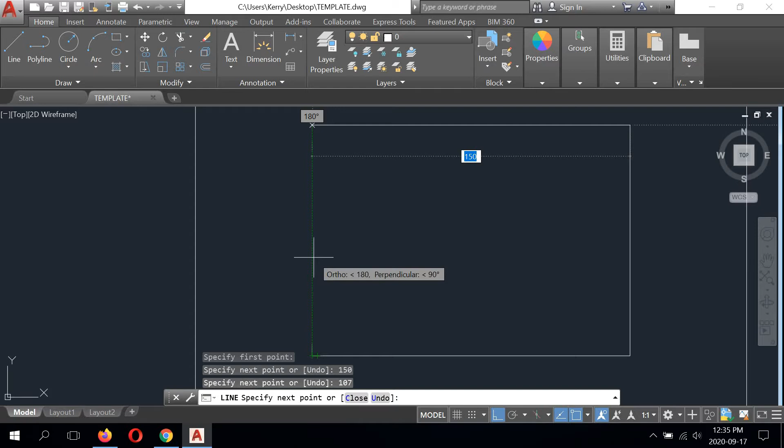Now to come up vertically, it doesn't give you an overall length. It gives you two numbers, 72 and 35. So to add those numbers up, I'm going to get 107. Key in 107. Now, instead of keying in 150, like I've shown you before to come back, I'm going to bring my cursor down, and I'm just going to touch the origin where I started. And this is going to create what's called an OTRACK, where you see this green broken line, and it actually previews 150, as you can see there.

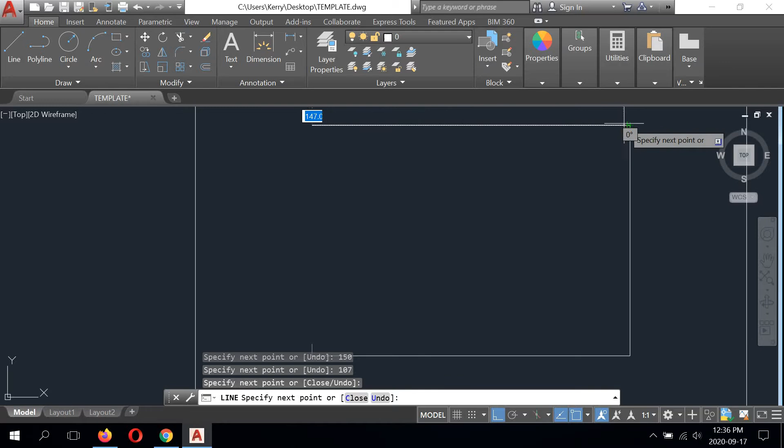So this is one way to avoid having to key in redundant information. You can just touch certain parts of the drawing with your cursor, and the OTRACK will pick it up for you. So that's what's happening here. So while I see that, I'm going to left click, and I've got this line drawn 150 millimeters long. Now I can just come down and type C enter to end the command and exit out of the line command. So moving onward.

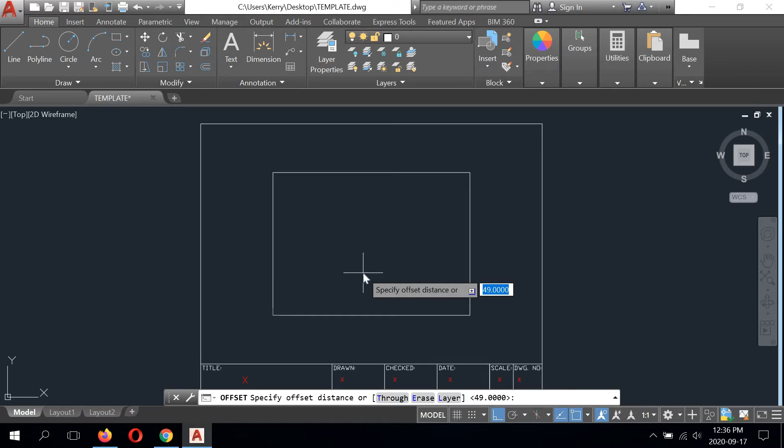We're going to start with doing all of the bevels first, or the chamfers we can call them. So I'm going to start by picking offset, and I'm going to do the first one, which is 20 millimeters away from the left vertical line. So I'm going to type in 20, and I'm going to select this line and click to the right, right click, left click, enter to escape the command. Now we're going to go into polar mode. That angle is 30 degrees, so I'm going to make sure that this is changed or set to 30 degrees.

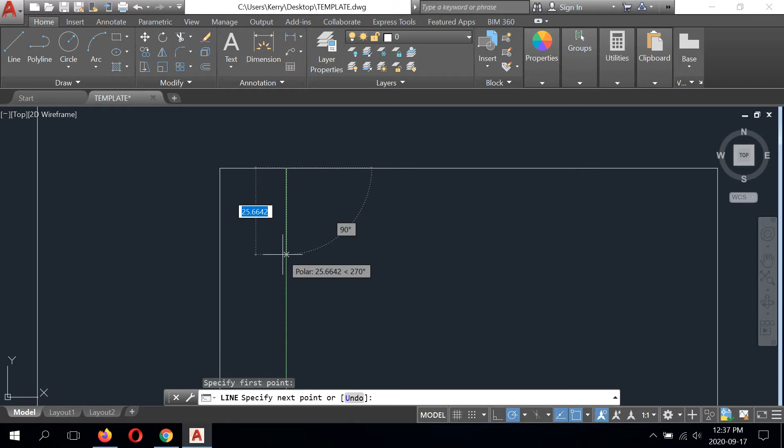Pick my line command, come into this endpoint, and come down on 120. 120 is the same thing as 30 because this is 90 degrees, and adding 30 will make it 120. So we'll come down to this intersection and left click, right click, left click. We're going to take this line and erase it because we don't need it anymore.

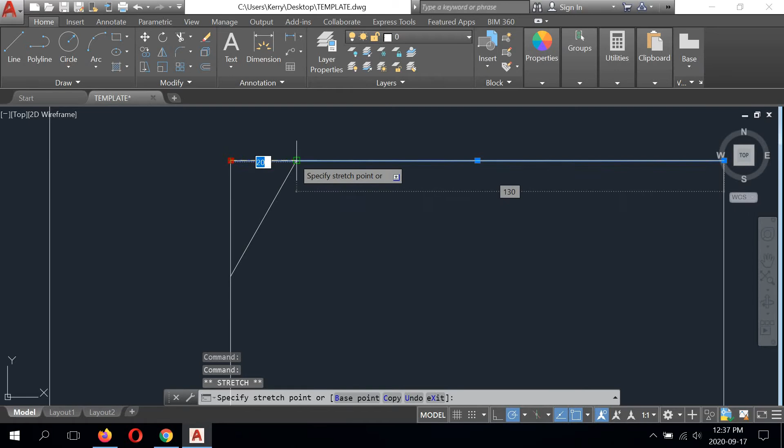And instead of using the trim command, there's another way I can clean this up. I can just select this line while I'm using a grip, and I can just select the node and I can drag it back to this endpoint. And I can also do the same thing here. Pick this node, drag it back to this endpoint, and that's just as good as trimming. So that's just another alternative for you to use.

The idea of showing you all these different commands is that the hope is you're going to see what you like and you're going to develop your own style, right? Every student may draft a little bit differently, but it doesn't matter as long as the end result is correct. So I want you to try to find what you like and kind of get into that groove.

Moving onward, we're going to look at the top right hand side of the drawing, and we're going to create the two angles that are 15 degrees that intersect one another. So to find the length of it, it is 72 millimeters from the top right to the left. So we're going to use an offset. Key in 72, enter, select this line and click to the left. Right click, left click, enter.

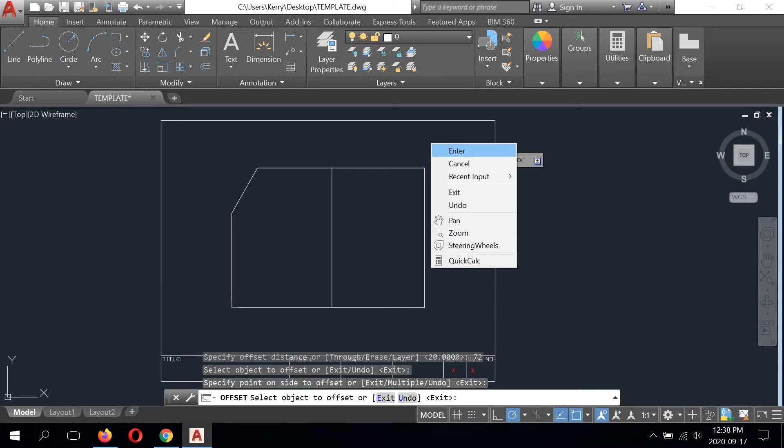Now we're going to go back to polar. We're going to change the setting to be 15 degrees. So we're going to change it here. Pick our line tool again, pick this endpoint, and we're going to come on an angle of 165, which is 15 from 180. That's going to land us about here at that intersection. Right click, left click, enter. Right click, left click, repeat line. This is the same angle, so start at this endpoint, come down on 75. 15 less than 90.

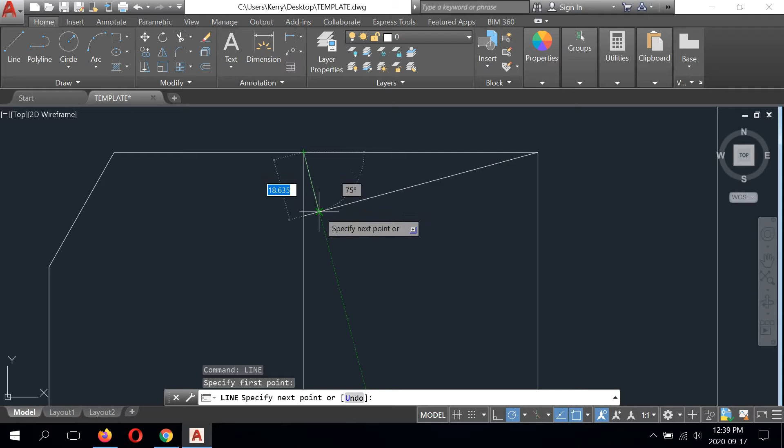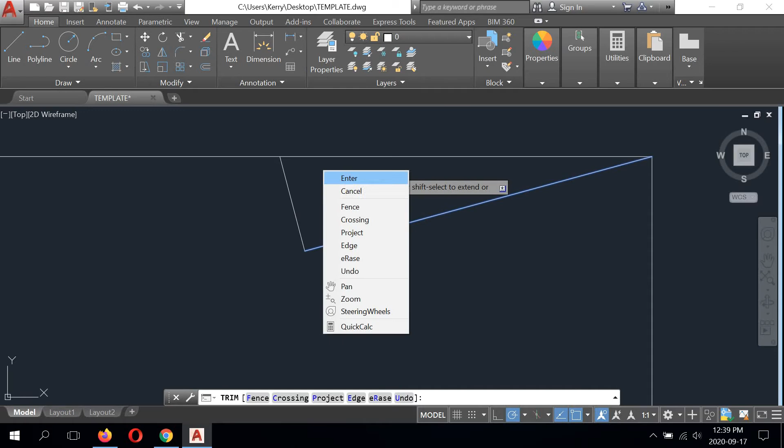Intersection. Right click, left click, enter. Okay, so this line can be erased. We can trim this or we can use a grip. I'm going to use a grip for now, so I'm going to select it, just snap it to that endpoint. And I'm also going to trim. I'll trim this one up here just for fun. Boundary. Right click, left click.

Okay. It's the exact same thing in the bottom right-hand corner, except it's vertical. So again, we're going to offset again. Now, I don't need to key in 72. I can just hit enter, because if I'm repeating the same offset, AutoCAD remembers the last input. So it remembers 72, so I can just hit enter and pick this bottom horizontal line and then offset it up. Right click, left click, enter.

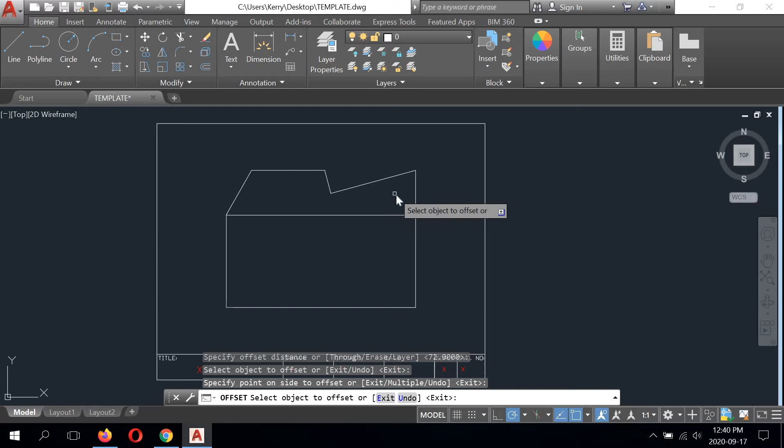Select our line. Start at this bottom endpoint snap, click, and come up on 105, which is 15 more than 90. And end the command at this intersection, left click, right click, left click, repeat line, select this endpoint, and we're going to come down on 165.

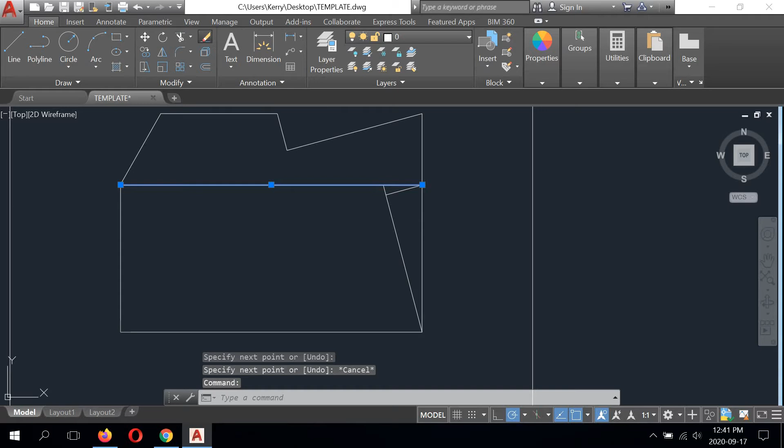This line erases. We can use a grip, bring this down into that endpoint, and we can use a trim.

Sometimes it's clunky for me to end some of these commands because I'm recording while I do this, and if I was to hit my escape key, it'll actually just end the recording. So I have to make sure I never touch my escape key. It's the one thing I can never use when I do these lessons, and sometimes I like to use it when I'm making drawings on my own. So that's why sometimes it looks a bit clunky when I'm trying to end these commands.

Okay, moving onward, we have one more angle left, but we're going to do this one a different way. This is something I've never shown you. We're going to use a modify tool to do it. We're going to modify existing geometry. So up here in modify, next to mirror, we have the fillet tool. And if we click the arrow, more options appear. So we want to select chamfer.

But we just can't go picking and choosing. We have to read the command line. The command line says, select first line or undo, polyline, distance, angle, etc. We have a distance of 28 and an angle of 45 degrees, according to the iPad I'm looking at. So I'm going to select angle, and I'm going to key in the distance as 28. And now it asks me what the angle is supposed to be. Well, the angle is 45. So I'm going to type that in, hit enter.

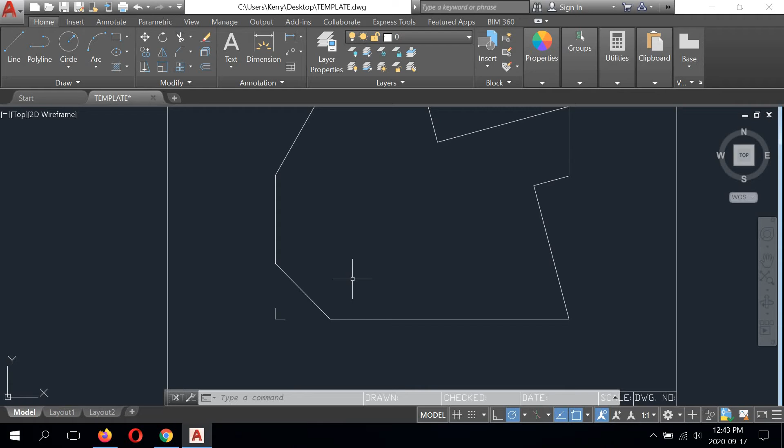And then I can select this vertical line and this horizontal line. And it's automatically going to modify that geometry to give me that bevel in the corner. So instead of using offsets and using a polar, this is a quicker way to execute that angle. So that's something else you can add to your toolbox.

The next thing we're going to look at is the symmetrical, I call it an arrowhead, that sits in this area right here. So to find some starting positions, we're going to use offset again. This time key in 16 as your value and hit enter. And I'm going to offset this line up 16. Right click, left click, enter.

Now we're going to have to offset this line over. Now there's no whole value for that. I have to add some numbers up. From the bottom left-hand corner of the arrowhead, from the most left vertical line, is 57 and 28. So the easiest way for me to add that up in my head is to just add 30 to 57 and then subtract 2. That's something my grade 5 teacher taught me. So 57 plus 30 is 87, subtract 2 is 85. So 85 is our number.

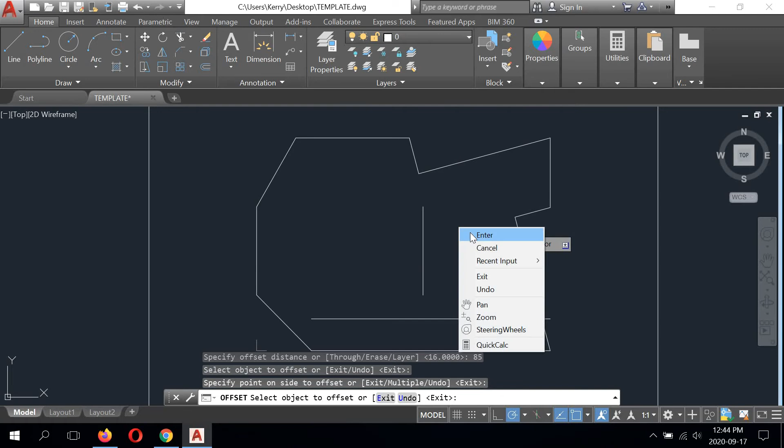So select offset, key in 85, hit enter, and then select this vertical line and click to the right. Right click, left click, enter to end. Now, because I've already done this chamfer, this doesn't reach down like I need it to. So what I can do is I can turn my ortho back on and then just select this as a grip, pull it down to meet the perpendicular snap.

And then one more offset to find the center of this. So I'm going to hit offset, and the next one is 23. It's symmetrically 23 on both sides of the arrowhead, so we need one offset of 23. Let's try that again. Just hit enter. Right click, left click, enter. Okay, so now I have, this is going to represent the center. This is the anchor point to get that arrowhead started.

So the angles we need are 45 degrees and 15 degrees. So I'm going to go back into polar mode, right click, select 45. Actually, I'll keep it on 15. I'll do that one first because it's already set. So I'll grab the line, start at this intersection and come up on 15 degrees and then end at that intersection right there.

Right click polar, switch the angle now to 45 degrees. Right click, left click, repeat line. Find that endpoint. Find 45 degrees, see that green beam, and bring it right up to that intersection. Left click, right click, left click, enter. So there's half of the arrow drawn. Now this line and this line I can get rid of. I'll just erase them. And I can mirror this to the other side.

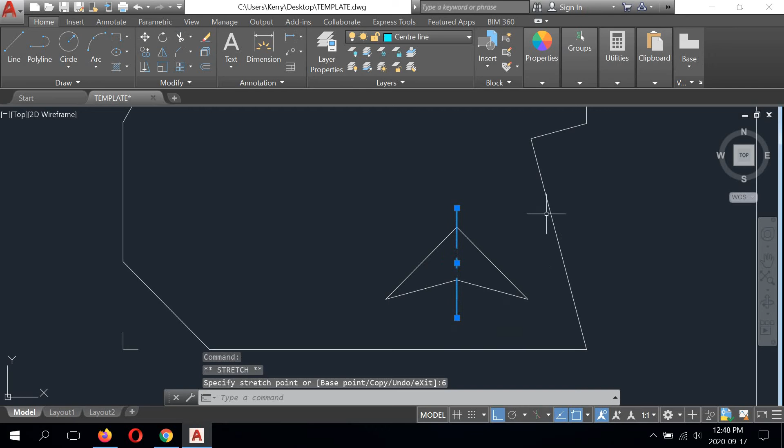We're going to take this one, stretch it down vertically, and key in 6 here. All right. So that center line is to represent the symmetry of the arrow, right? This drawing only requires 1, and we'll talk more about that another time. Okay. I'm having a problem with exiting my commands again.

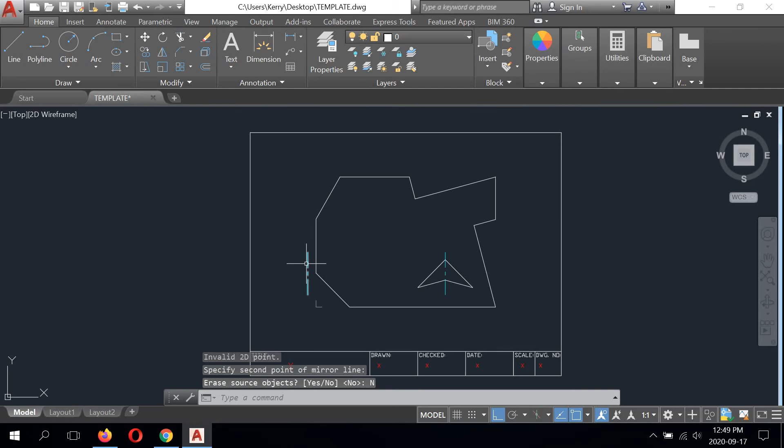Okay, so the last thing we have to do is draw that horizontal bevel T that you see on the drawing. So we're going to start with offsets again. We need to find some offsets to be able to find some anchor points to start drawing lines on polar. So we have a line that comes up 27, then comes up 30, and comes up 30. So we're going to start with the line that's 27.

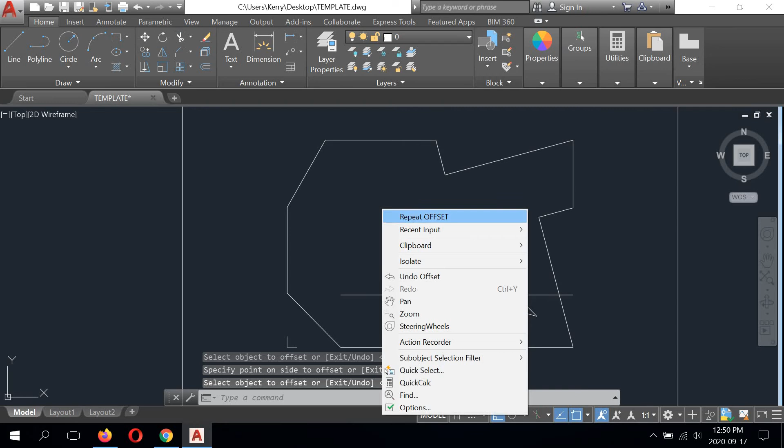Type 27, enter, take this horizontal line, and offset it up. I have to end the command here because I need another offset value. So I'm going to right click, left click, repeat offset, and I'm going to key in 30 this time. Enter. This line is offset once and twice because it's the same value. Right click, left click, enter.

Okay, now we need to offset this vertical line over. That is shown on the drawing as dimension 29 millimeters to the center tip of the T. So again, the offset this time will be 29. We'll key in 29, enter, offset this line over to the right. Right click, left click, enter.

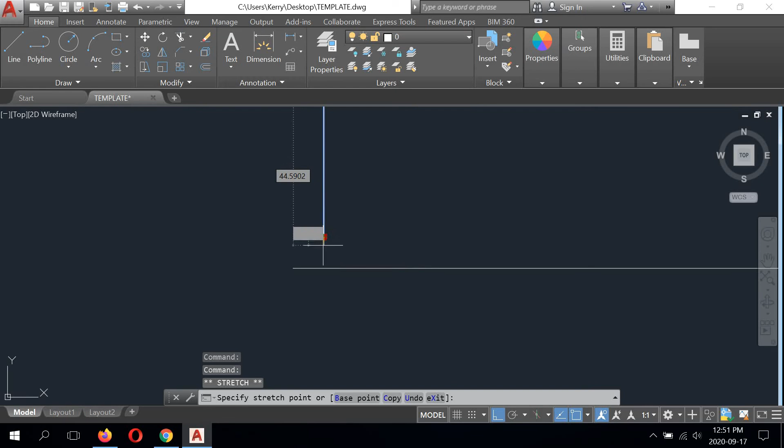Now you're going to notice, this is where you can make a mistake. This line, because of the chamfer, is not touching this horizontal line. It's very important that it does because the bottom left-hand corner must start here. So this line can be selected and gripped down to perpendicular snap. This one here also has to be gripped and brought up.

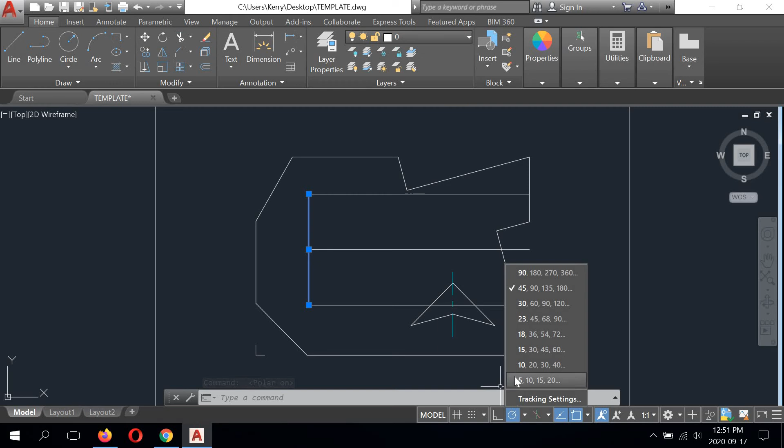Next, we can actually start drawing some lines on polar. So this polar angle has to be switched on. So polar is on again and switched to 15 degrees. Select the line and make sure that you're selecting this midpoint. Don't be selecting this endpoint. You could actually trim this off if you're not sure. But I'm not going to, I'm just going to start at the midpoint.

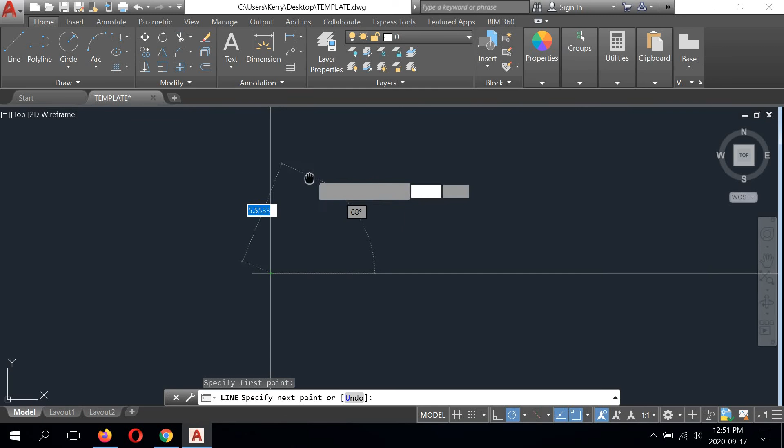And I'm going to come up on an angle of 75 degrees, which is the equivalent of 15. So come up to this intersection and click. I could mirror this, but I'm not going to mirror it. I've done too many mirrors lately, so I'm going to right click, left click, repeat line, go to the same starting point, and come down on 75.

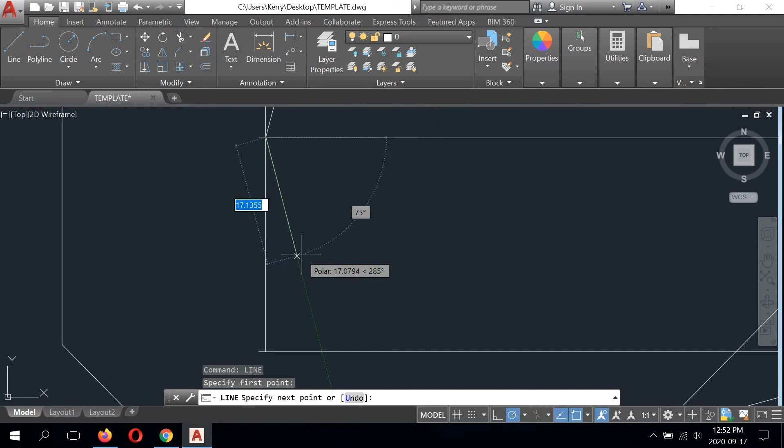Intersection. Okay. Now we need to add some thickness to the top of the T, so it's showing as a value of 11. So we're going to go into offset, key in 11, enter, pick this line, click, pick this line, and click. Okay.

Next, we need to add some thickness. This horizontal line here represents the center line of the base of the T. And it's showing at a value of 11 as well, so we're going to offset it 5.5 each direction. We have to take 11 and divide it by 2. So we're going to hit offset, type in 5.5, which is half of 11. Hit enter. Pick this line, click up, and click below. And now we have it. Right click, left click, enter.

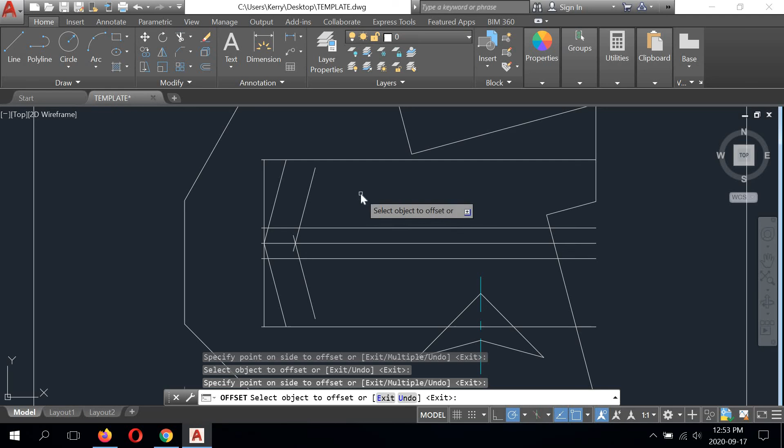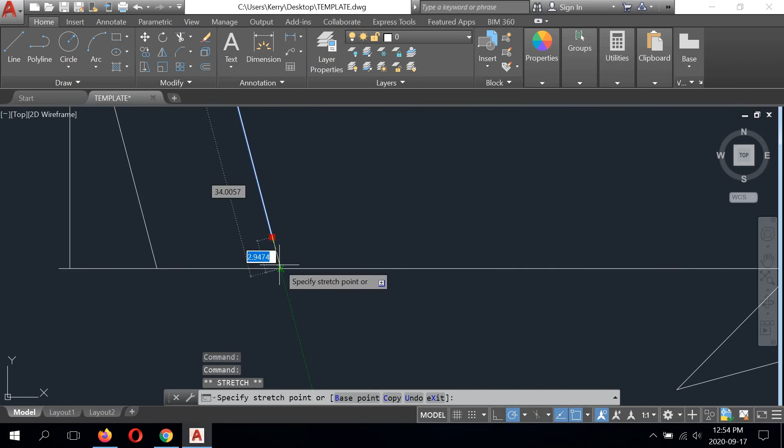Now we're getting a little crowded with line geometry, so I'm going to attempt to clean some things up before I continue. So this line here has to be extended up to this intersection. As long as polar is on and the angle is still set to 15 degrees, we can zoom in, click this line, and continue it on up on that angle to that intersection. This is one method. There's another method, but I won't show it to you right now. Bring it to that intersection. Okay, so that's extended, that's proper.

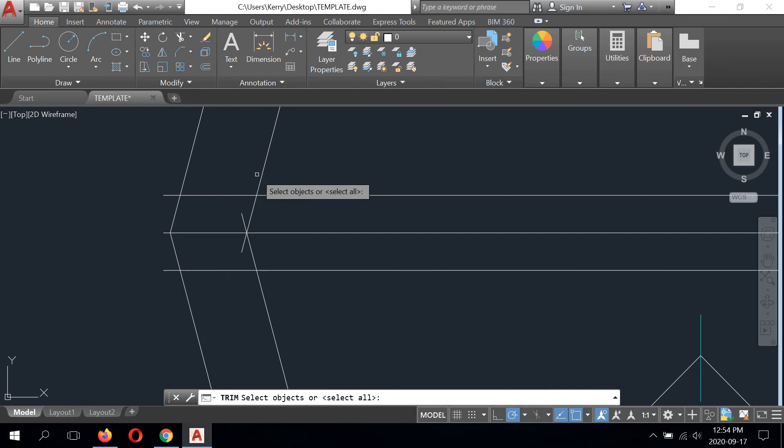Next, we're going to do some trimming, right? So we're going to take this line, we're going to erase it. We're going to pick trim. We're going to select these lines as boundaries. We're going to trim this part of the line, this one, and this one. And this line here can be erased because it's not needed. And we can also trim away this and this because this T is represented by these two boundaries.

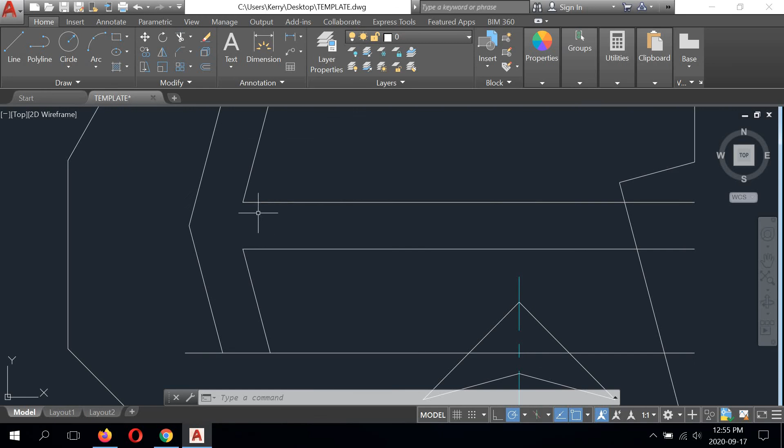Okay. So to find the length of the base of the T, it shows a dimension of 49. It's dimensioned from this corner right here. So what I can do is draw a line from top to bottom and offset it 49.

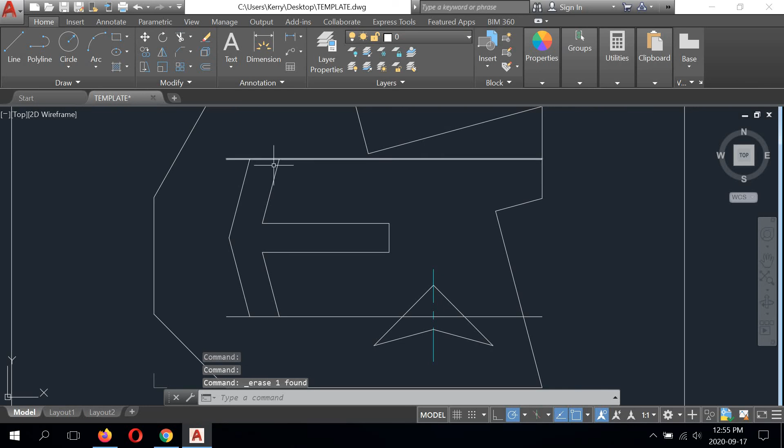And then trim. So we're going to trim. This is the boundary. Right click, left click, left click. This line can be erased. And then these lines have to be trimmed. So we're going to select trim, pick this line, and these two. Right click, and then trim the excess on the top of the T.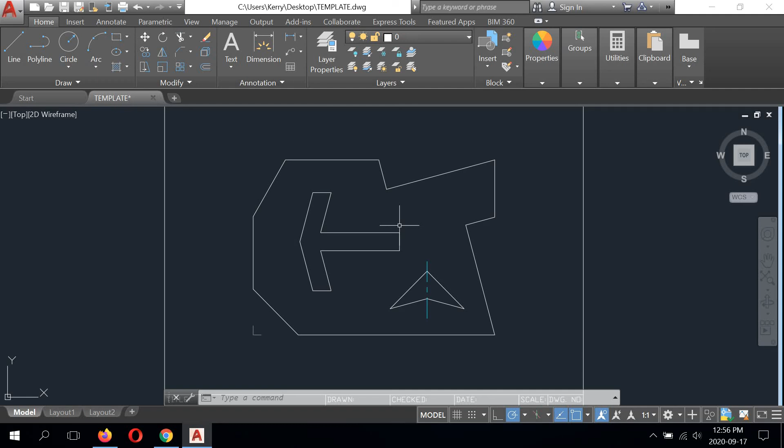And that, my students, is how you draw the template, or I should say one way to draw the template, because you may have accomplished it your own way. But that's how I did it, and I'm glad I was able to do the lesson and show you a few new commands that you can add to your skill set. So if you haven't done this drawing yet, try it out. It's a great one. It concludes our single view drawings. In our next AutoCAD lesson, we'll take a look at orthographic projections.